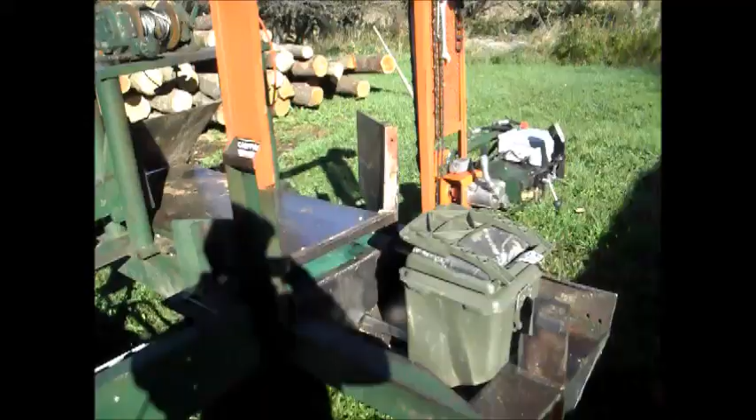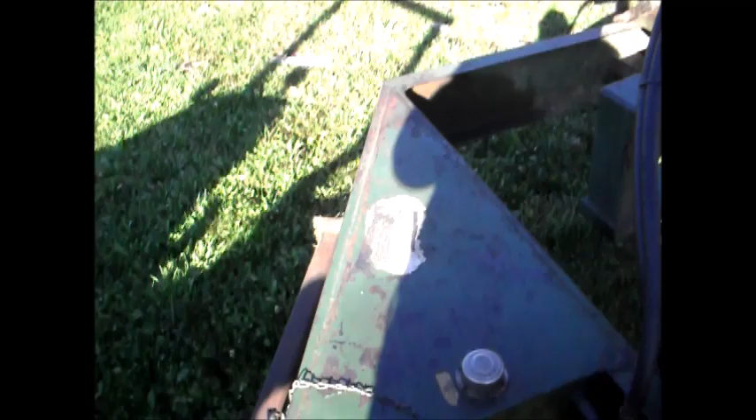It's just an old hunky junky firewood machine that actually was built at a factory, or built by somebody that at least made a sticker for it. Built by the Wood-Eze company, Three Rivers, Michigan. I found them on the internet, I think, and I think it's an insurance office now. But anyway, it's pretty simple.

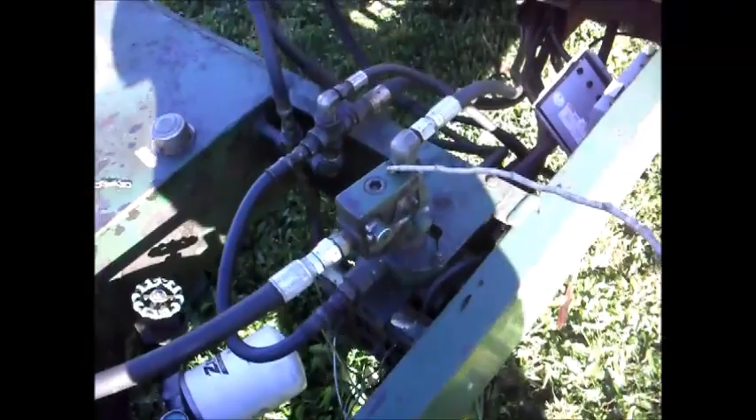Just got your old style PTO pump. I have upgraded that to a newer pump since the old one had aluminum housing and was worn out. So I bought that new, upgraded that, and then the power comes up to this little diverter valve, and a little bit of oil goes to the saw bar, and then the rest of the oil goes down to this solenoid pilot operated control valve.

Its solenoid pilot pressure moves a big spool in the control valve. Hope that never goes bad. I've never seen any parts for that. It's Racine or something hydraulics. And then the controls are all back here.

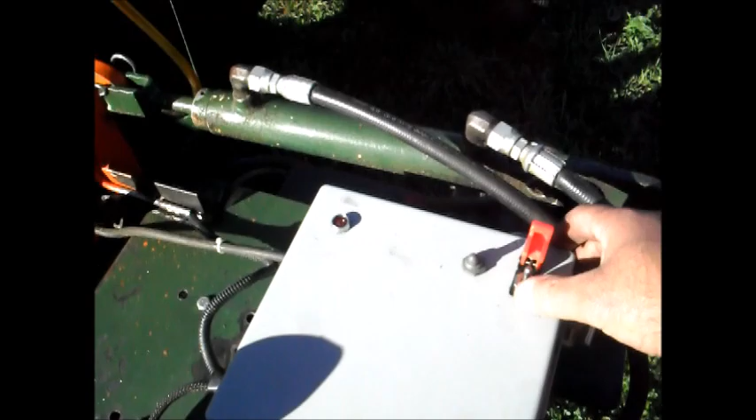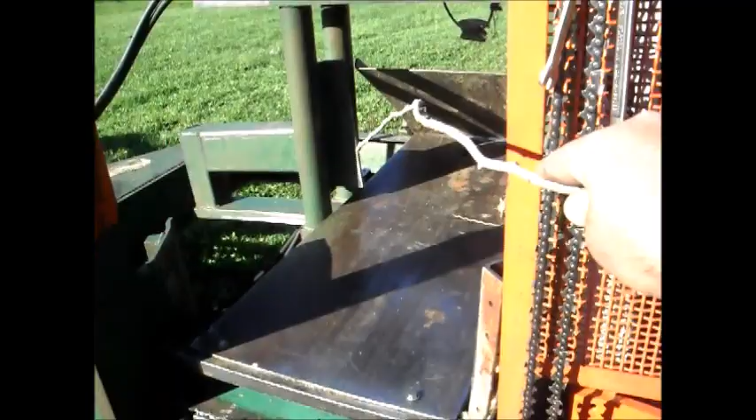Pretty simple. This is the main, this is lights. This is the winch to winch in. And then this is the handle that basically runs the rest of it. Up and down is the saw bar, up and down. You got splitter, extend and retract. And then you got saw clamp, or log clamp, that's there. That clamps the log and feeds the log in. So you clamp the log, and that's hooked to the splitter, and the splitter advances the log and splits the piece of wood you just cut.

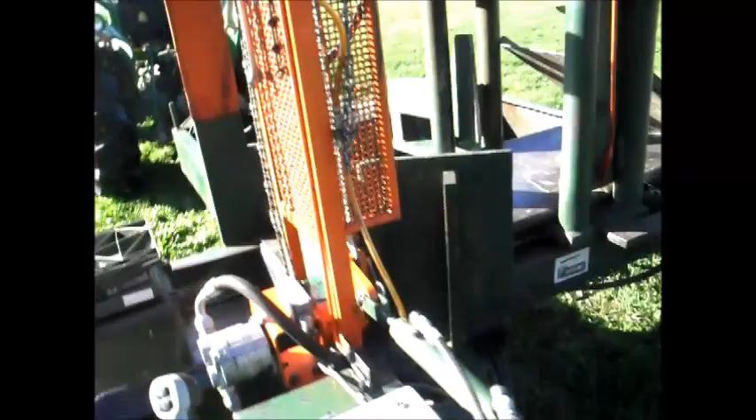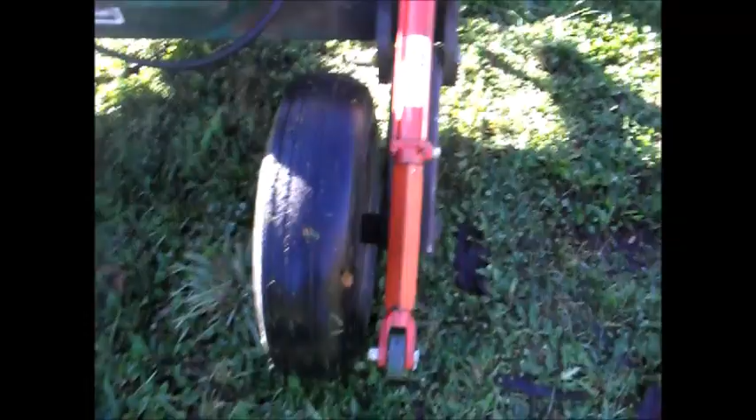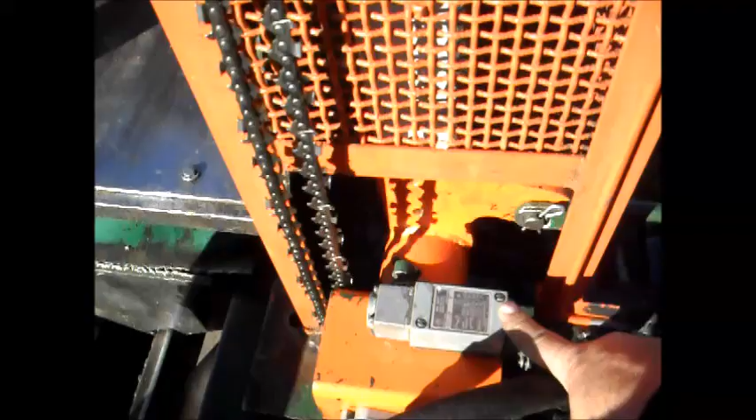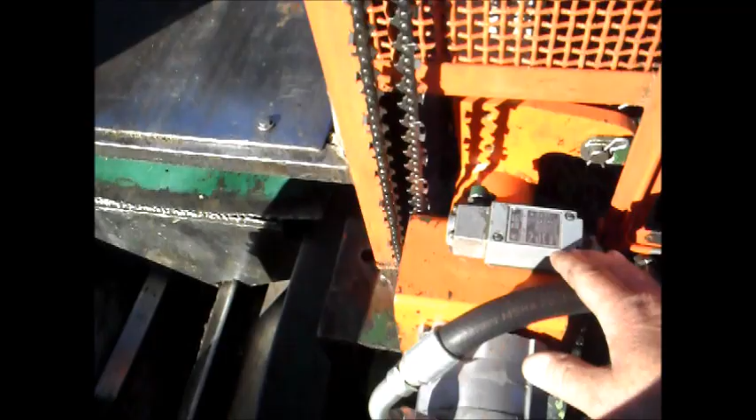And then when I got it, the wiring was all messed up. I screwed around for 3 days and discovered I had a bad ground. What a dumbass. But anyhow, since then I got a little bit smarter, a little more clever, and I fixed up the electric. Basically the power comes in, and then it goes to this limit switch. This limit switch is activated by the saw bar. When the saw bar is down, you can't split and you can't run the clamp. Basically all you can do is run the saw motor. So that saves you bending the bar, which is pretty clever. And when it comes up, you can do everything else but run the saw.

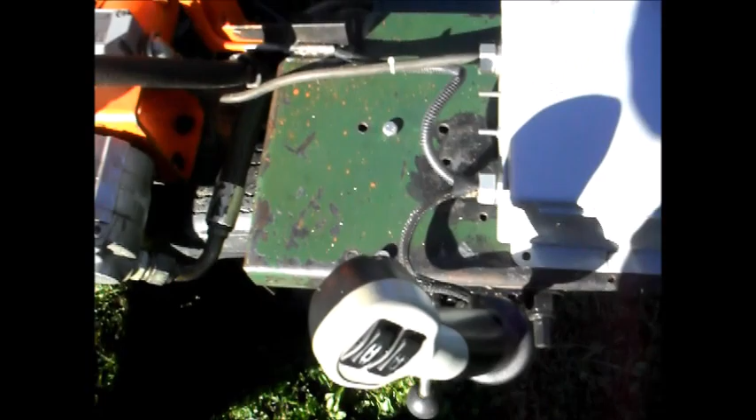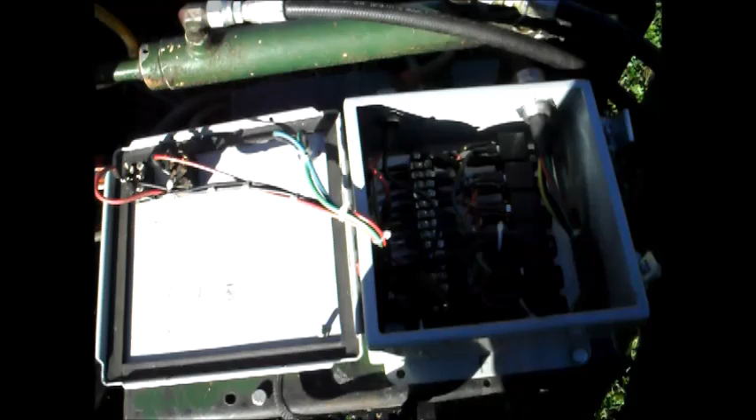And then we rewired the box. We got splitter, lights, and a cool little indicator light to make sure we got power back here. We rewired it, and we got a circuit breaker in there, and relay controls for our little micro switches. Hopefully they hold up better with the relays in there, and a terminal strip in there to make it easier to figure out where you got power and where you don't, because occasionally you have to work on this hunk of junk. Nice NEMA or Hoffman enclosure.

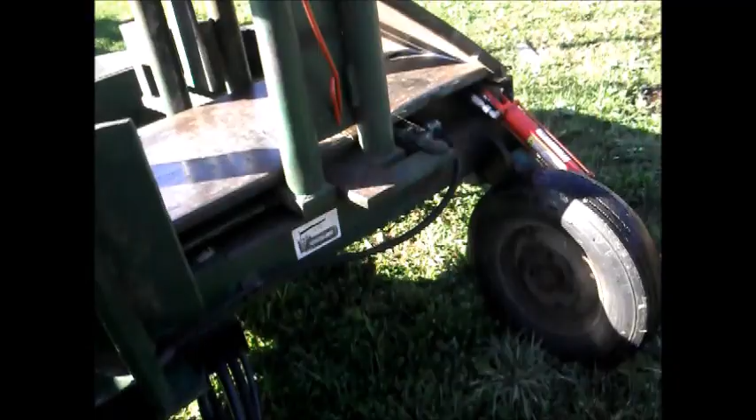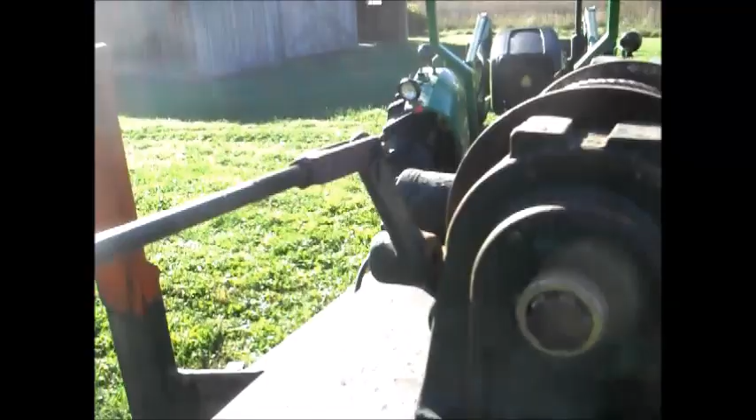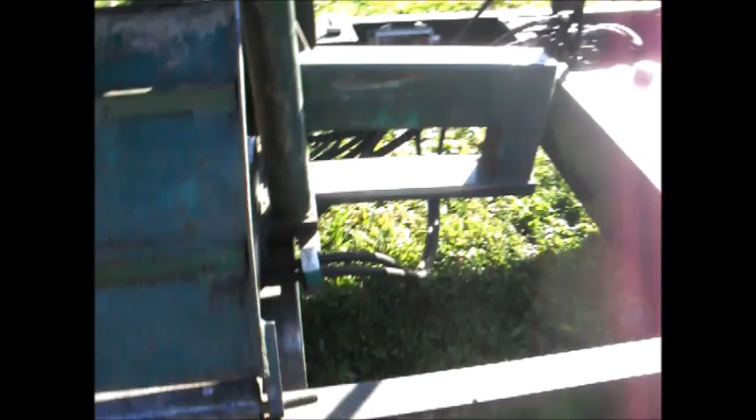And then, I don't know what else to say. This is the winch. This is the free spool position. You can winch her out. We'll show that later. And then this is a ramp. Once it's tilted, the ramp goes down, and the ramp lets the wood up. Pretty simple operation. Just keeping it running is sometimes a trouble.

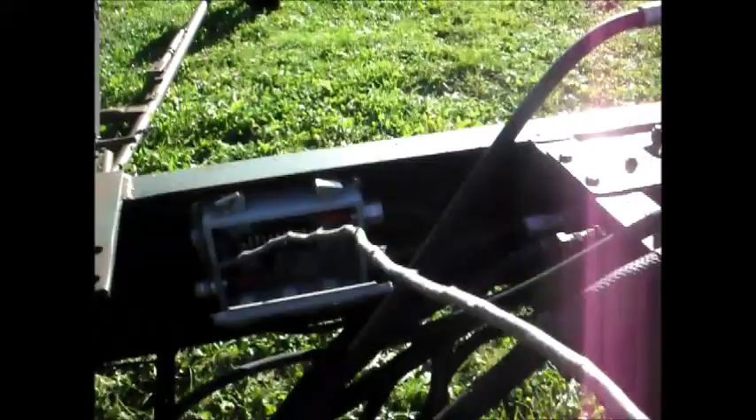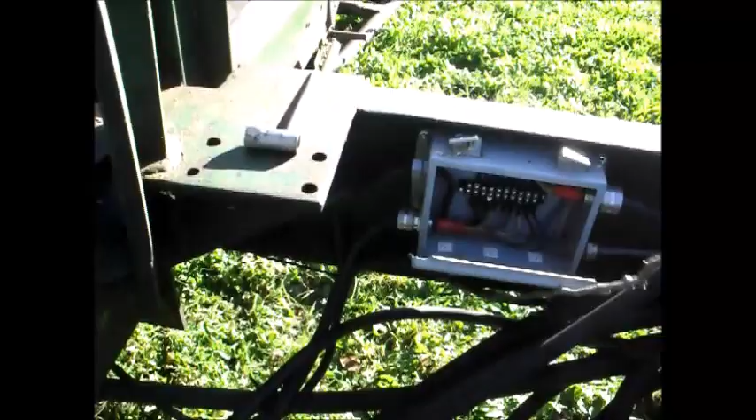And then we got this other junction box here, because we got a big heavy wire that comes up from the front to the back, and then a little harness that comes up to our valve. And this little box here, I had this friggin' saved from work. It had all kinds of switches in it. It was a pretty nice setup.

And my dirty little buddy Jeremy, he friggin' absconded with it. I finally did get my box back, and of course it was missing the switches and all the guts. It was even missing the subplate. I had to make a new subplate. You friggin' cockroach, you. But anyhow, he ain't a bad guy. He's just a little messed up.

So that's pretty close to it. Oh, we added a filter. Hydraulic tank is right there under the pointer. Fixed up a couple little spots where the hoses rubbed, made some new deals there. But all in all, I ain't spent a lot of money on it.

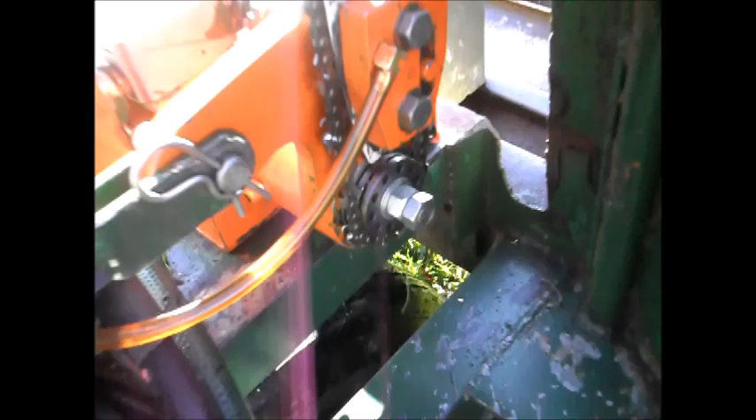I had my good friend, Dave Webster. I was in real bad trouble here. My sprocket had spun off. Everything here, this whole thing was junk. I took it to my good buddy. He fixed her up in ways you can just never believe. He's got a cut off drill bit in there as a key, and man, I've been honking on this thing and I can't break it. I got the materials and tools to make a new one, but his hasn't failed, so we're going to keep going until it breaks. And then we're going to tell him what a shit job he did.

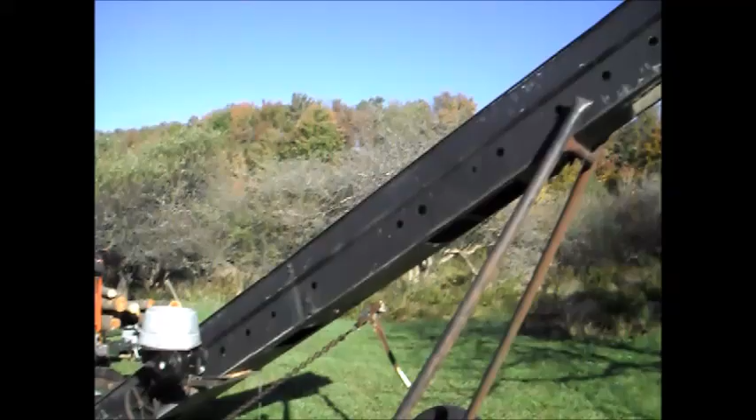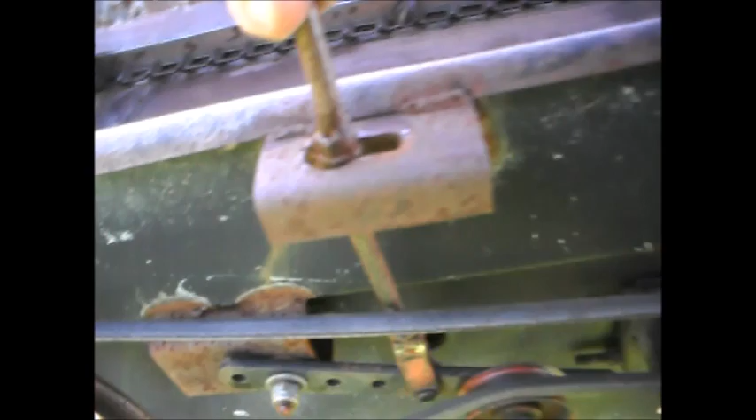Anyhow, now we got the mighty conveyor. This came with the machine when I got it. It was a hell of a lot longer. It's broke down enough that it's only 16 feet of usable stuff. It breaks down, we had to shorten it up. And then we got this fancy drive system here from an old Toro snowblower. Just tightens the belt, makes it drive. Occasionally you got to kick her out of gear because shit gets caught in there.

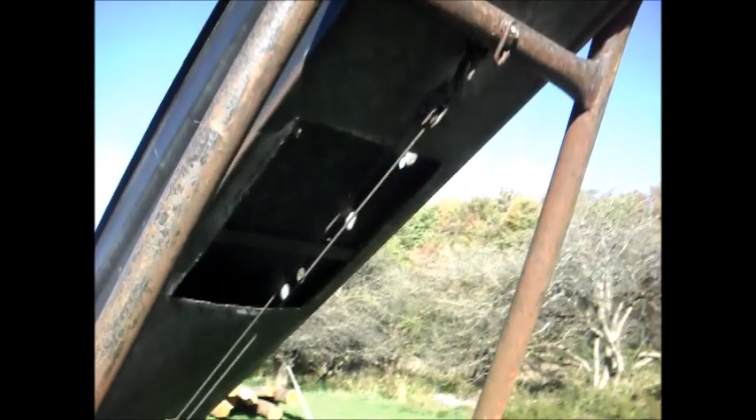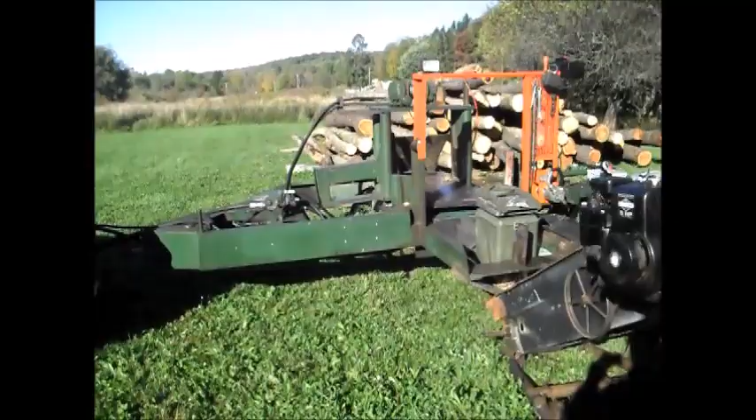I would not recommend anybody using a hay and grain elevator as a wood elevator. It don't work. Wood gets caught around, brings it down. That's why we've got all these holes cut in here. Hopefully the shit falls out. It don't. Usually gets caught up down here where it returns around and goes back. But hey, it is what it is. Don't cost much. This is the most expensive part here.

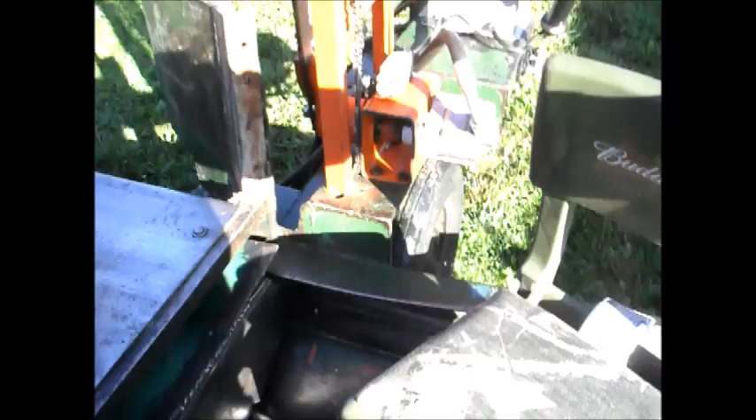It's this nice seat here. Just Budweiser on it, so it's not all bad. But I had an apartment, got stuck with a bunch of rent, 900 bucks. But I got this chair. So it's a $900 chair. Shouldn't be treating it like that.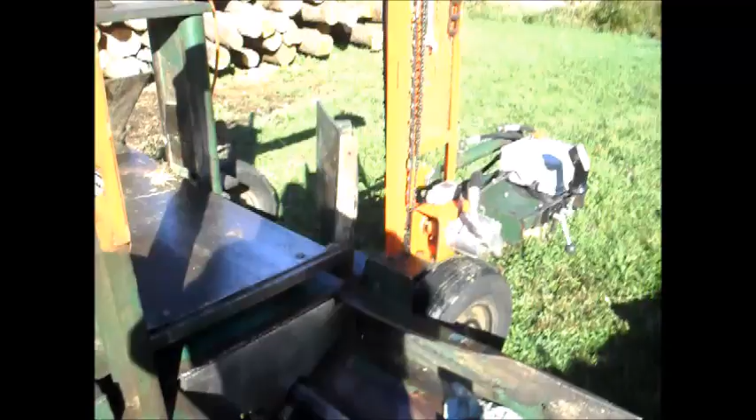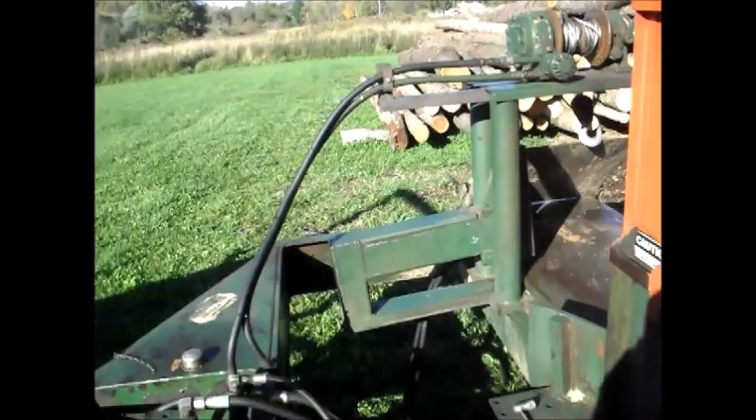But we'll get her fired up here. Get some wood running through it, maybe. Get a truck underneath our conveyor, maybe. And see what, we can make some sawdust and chunks of wood. Stand by, we'll be busting wood shortly.